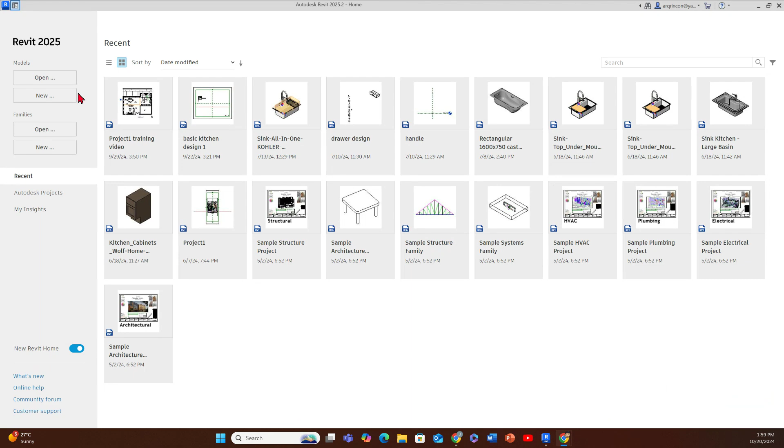Let's get into that Imperial multidisciplinary template. It's gonna be a really basic commercial project where we're gonna put some joists. The tutorial is already in Spanish, but I'm gonna try to do it also in English.

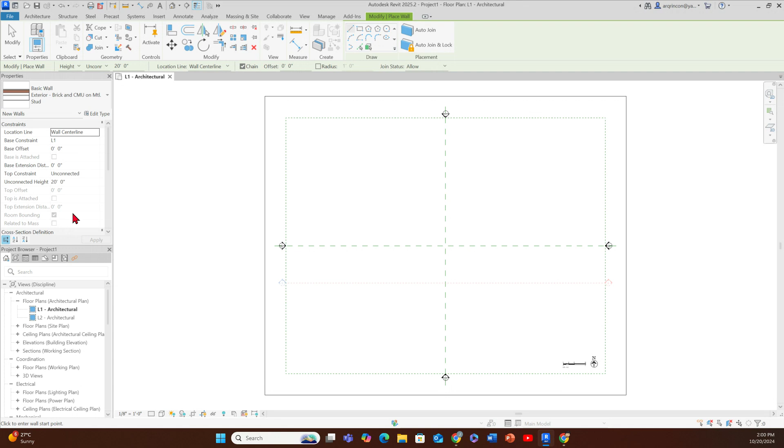Let's just start with our walls on our project on level 1, like we see here, level 1. We're gonna use those exterior fancy walls here. Let's try to use any of these ones here, we can change them later, just to make a space.

The beauty on Revit is this one that you're gonna see right away. Tell your AutoCAD to do this. If you're thinking to do the jump into Revit, well, just watch our videos.

You're gonna be surprised. If we select a vertical wall, we're gonna see a horizontal dimension, and the dimension is to the center. So just click on the little dots so you can push it to the end as well on the other side, and we can close this dimension to 100.

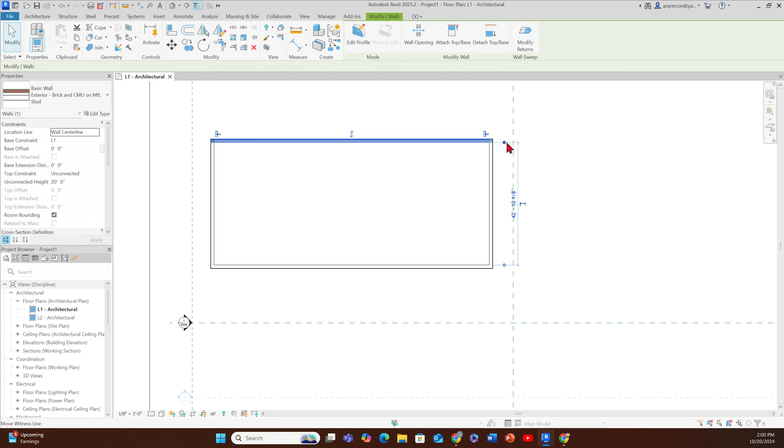Let's do it now with a horizontal wall, and let's do the same thing. Let's use those dots now that you know the little trick here, and let's change these ones for 50 feet. There we go.

So we got our exterior, right? We know that this one on the back is just a brick wall, a generic 8-inch masonry, 6-inch masonry, depends on our office standards.

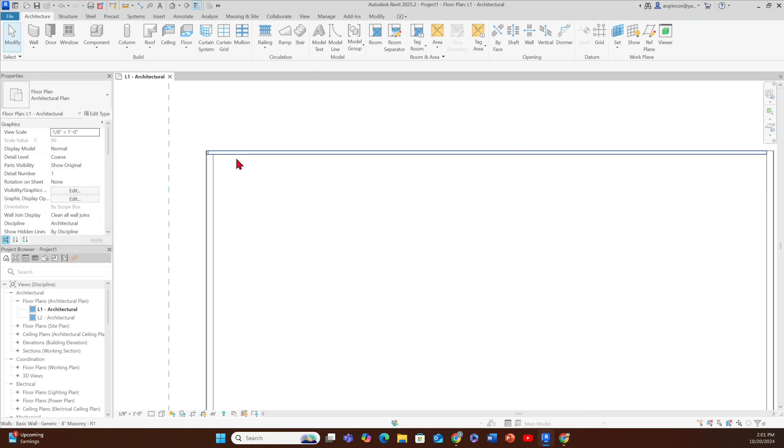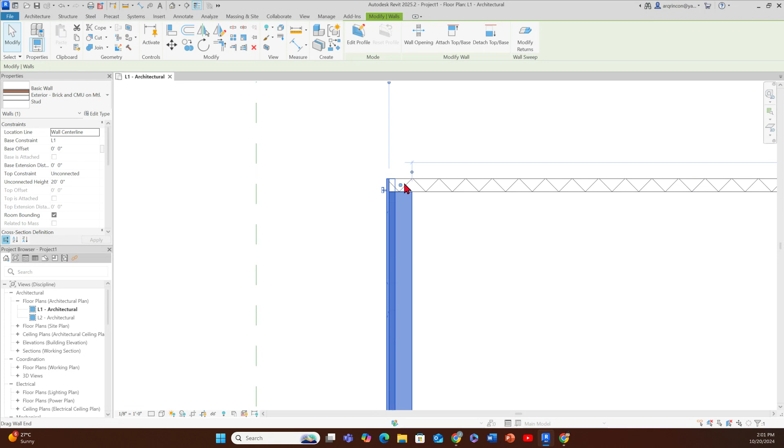There's a little problem here, the joining of the walls there, but it's not super major. We can bring this wall here or this one, and we can maybe work out the joint there. It's a matter of working this one out a little bit, and we'll get it done. Nothing major.

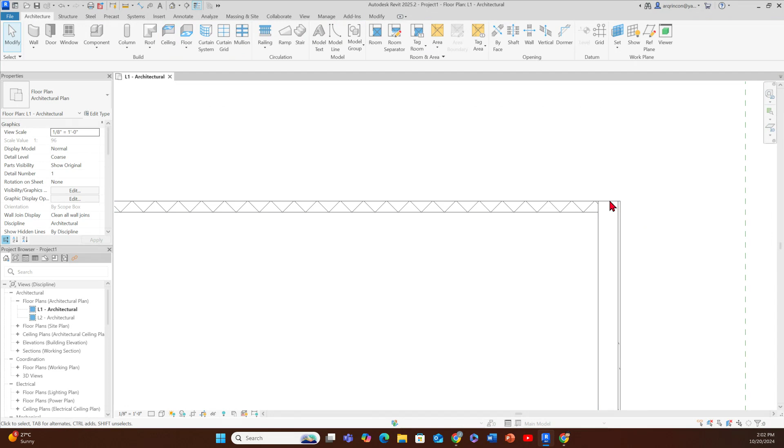Let me just get this one, and we can disallow the joint, or we can move this one. I can align the wall on the back and then bring this wall here so it can be flush like this one here on the back. A little bit of a problem there, but not much.

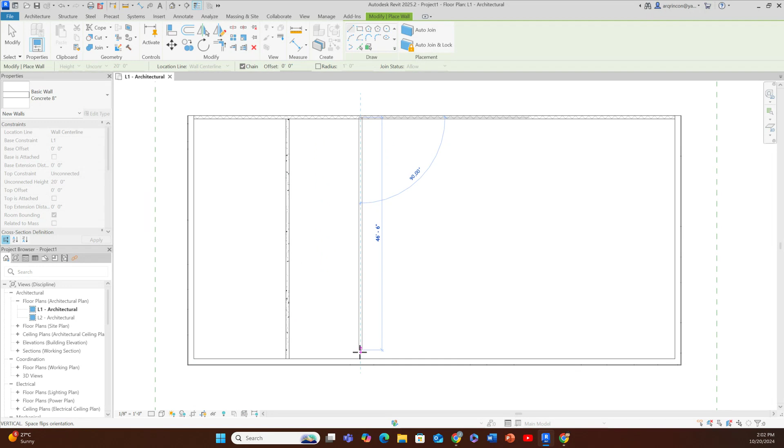There we go. So then here, let's place some interior partitions because it's a commercial project. I'm gonna use 8-inch concrete block right here to divide my rentable spaces. So I'm gonna go and do this. I pick up a concrete wall.

I'm gonna switch it. That's also one of the things on Revit. 1, 2, 3, 4, 5 spaces. I'm gonna select this wall, and I'm gonna change it. Instead of concrete, I'm gonna change it for 8-inch masonry, and right away you will see the hatch.

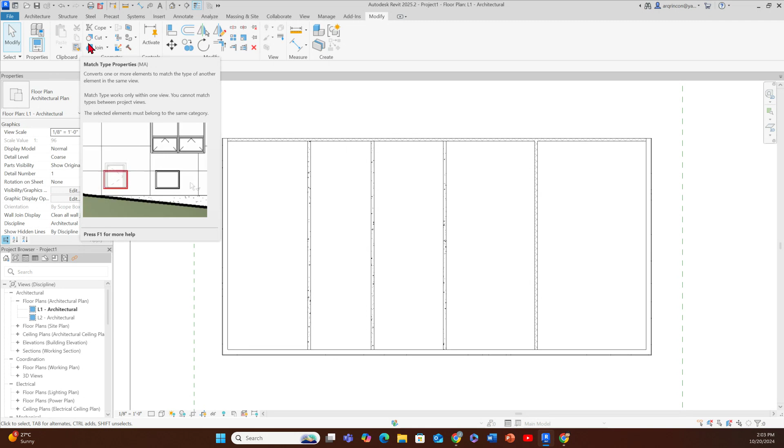So how to fix the problem that I did. Let's go to modify, let's go to match properties. If you hold a little bit, you will see a video there explaining the purpose of the command. So I'm gonna pick the properties. You see the brush is empty right now, is white, now it's black, and I can transfer those properties.

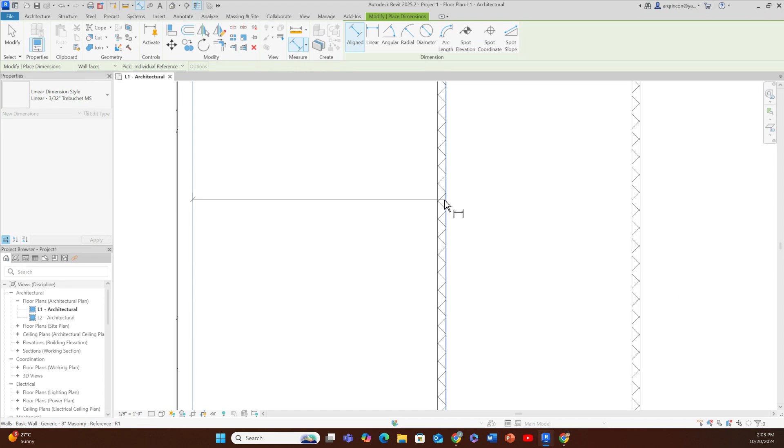Another nice trick from Revit is to go to annotate, go to aligned dimension, and use under wall faces, place a dimension right to the center of the wall, to the center of the wall, and to the center, and finally to the interior edge like we did at the beginning. You can move this dimension out if you want, and there's that equal sign, and now all the spaces are even. We can delete this one, already fulfilled the purpose, right?

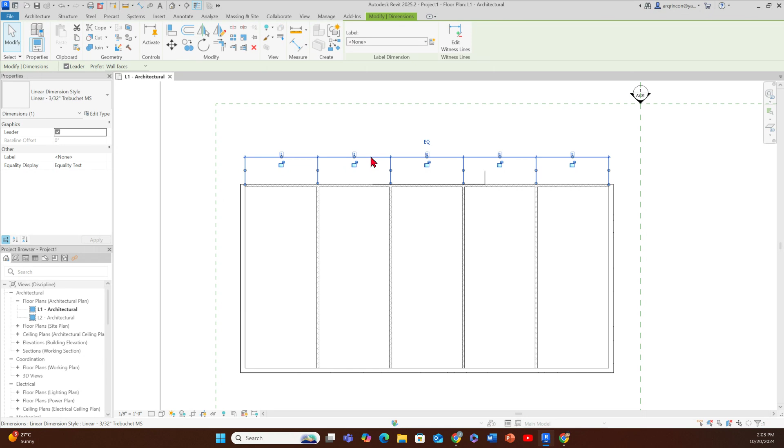So I constrained those walls, we're good. Now here we can use from the architectural tab, we can use a reference, right?

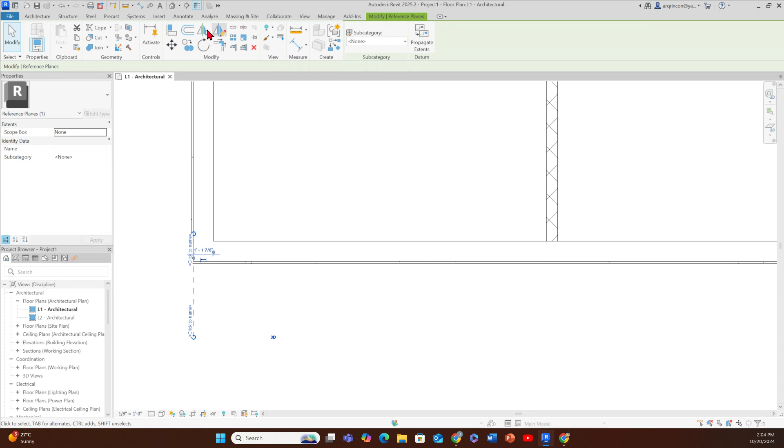A reference plane, you can use align, right? I'm gonna just use a reference plane here, so I can repeat this one or offset this one like 4 feet, right? I'm gonna try to offset this one. Okay, and I need here like 4 feet. Okay, it doesn't allow me.

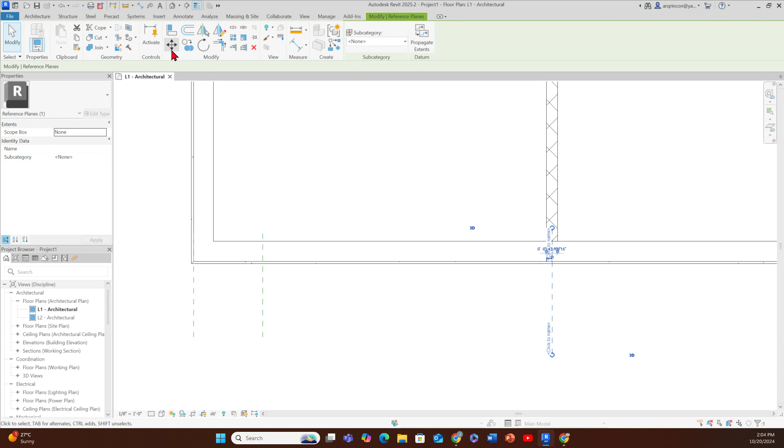Okay, so let me grab this one, copy, from here to here, right? And I can type in here 4 feet. There we go. Now I'm gonna get another reference plane from the center of my wall and copy it because it didn't allow me to offset. So I'm gonna get this one here, copy, from the origin of that line, and then 4 feet there.

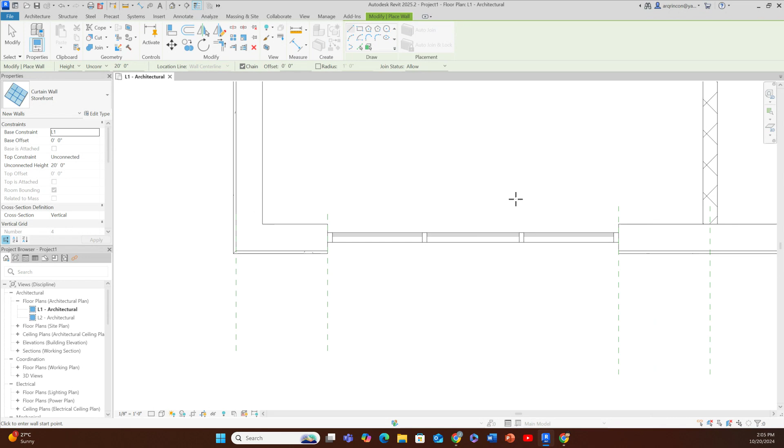Okay, why am I doing this? Because I'm gonna go and switch to the architecture tab, get a wall, and I'm gonna use the storefront wall to do a really quick basic storefront, right? So we can determine where is the front of the building, where is the back of the building, right?

Okay, so then let's go to the 3D view on the quick access toolbar. Right here we can select our storefront, and on the properties you can change the height. I'm going to change it to 16 for now.

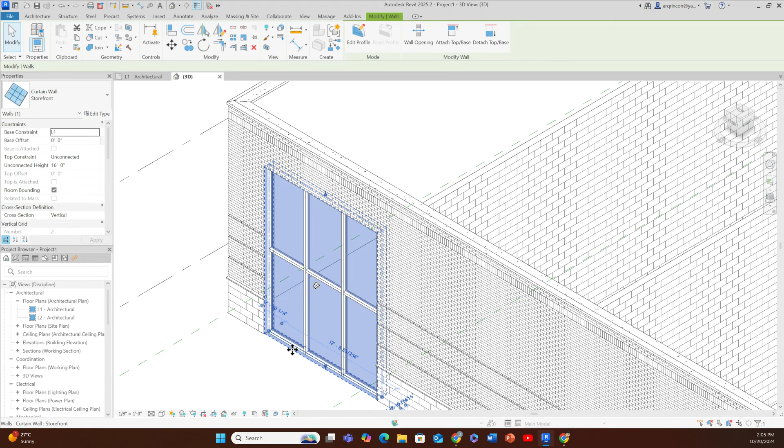There we go. Okay, that's another beautiful thing from Revit, that the Boolean operation is done just by manipulating our elements, right? Or actually you can manually, using that triangle, you can lower it down. Okay, that's it for now.

Okay, let's get this one. You're gonna see the mullion. Let me use the tab key. Grab the mullion, unpin it, and I can delete it, and I can later on place a door on this one here.

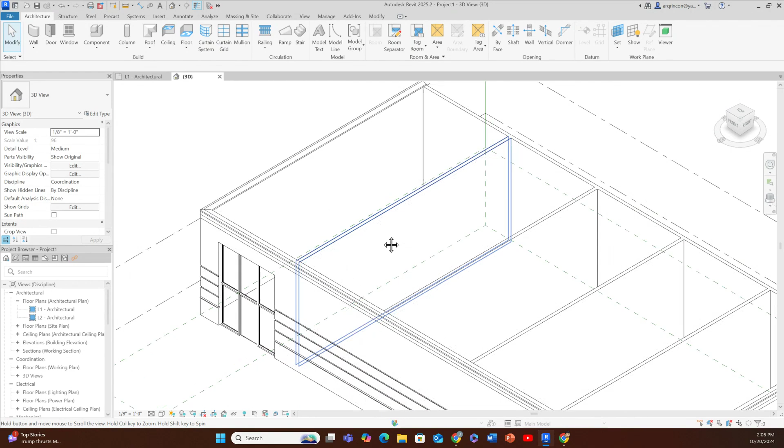Okay, let me just do something quick. Let's go to level 1, then to our south elevation on our template. Double click on elevation, and I'm gonna grab my levels and shrink them closer to my building.

This is gonna be 16 feet, and this is my ceiling level. Okay, ceiling level.

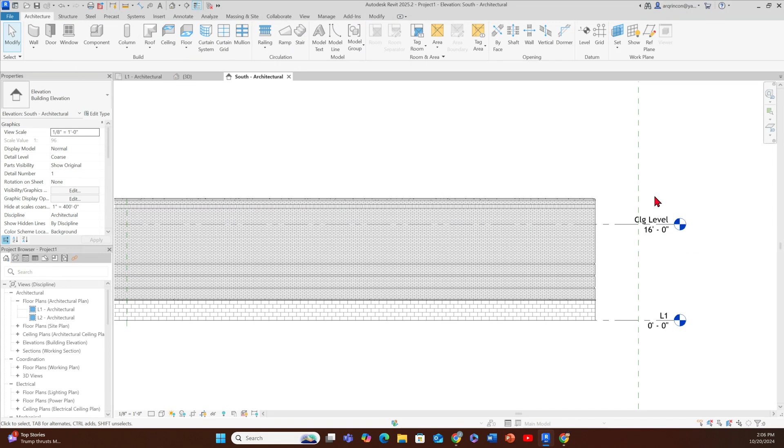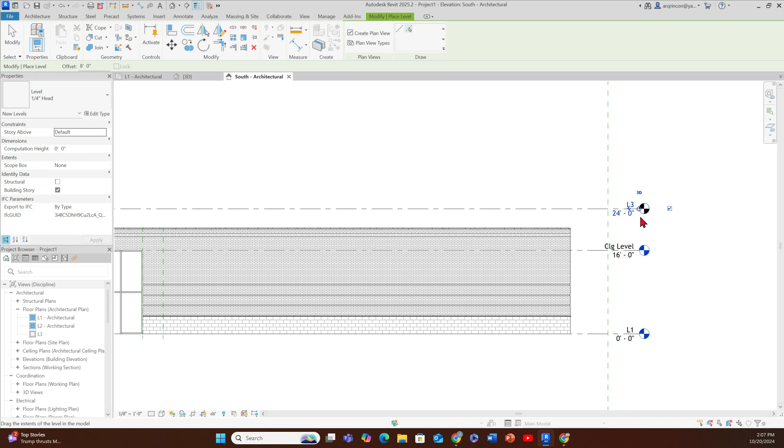I'm gonna create a level from the architectural tab. Level is under datum. Let's use this one. I'm gonna use pick line and manage an offset of, I don't know, 8 feet for now. Really important, under plan views, activate create plan view, because if it's not, it's gonna be a black symbol with no floor plan. I need this one because I'm gonna change it to be my roof level. Got it, roof level, and then I can rise all my walls to the roof level.

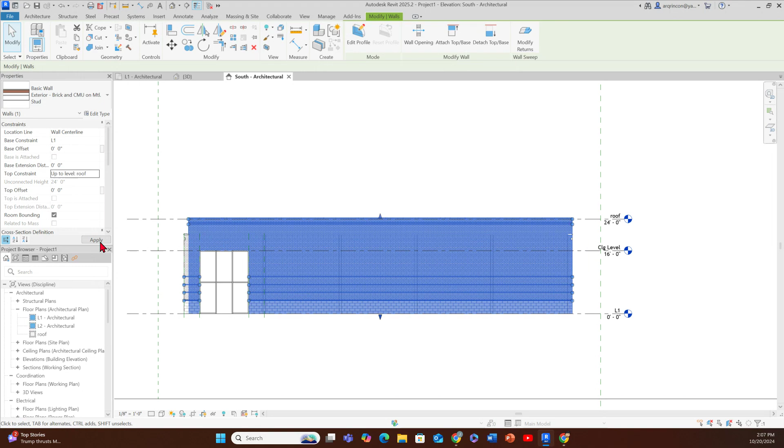So we select our wall, and on the top constraint you see it's unconstrained. I'm going to constrain it to my roof level and apply it so the wall will grow. Let me go back to my 3D because I want this one, and I'm using control to select two items at one time, and change this one also and constrain it to the roof on my properties. There we go, if I wait it will auto apply.

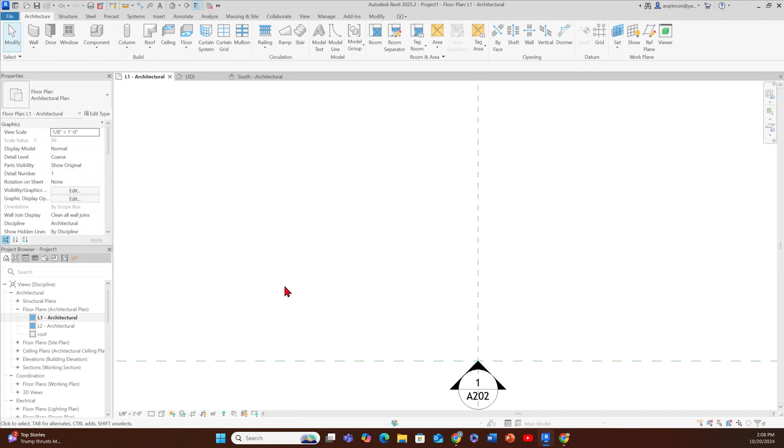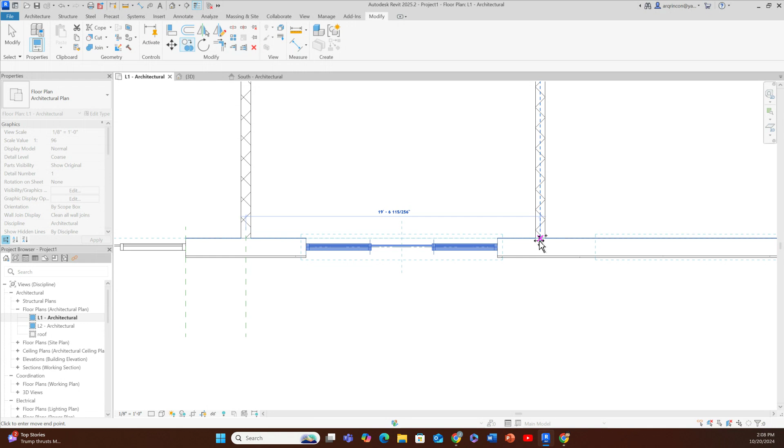Right, let's do this one really quick, the storefront. Let's go to level 1, zoom in a little bit, grab this mirror. I like the mirror with the pencil, and use the center line of my cinder block. Then here it can be easier because I can just grab this, copy multiple times, and use that intersection there, and I can get those evenly spaced.

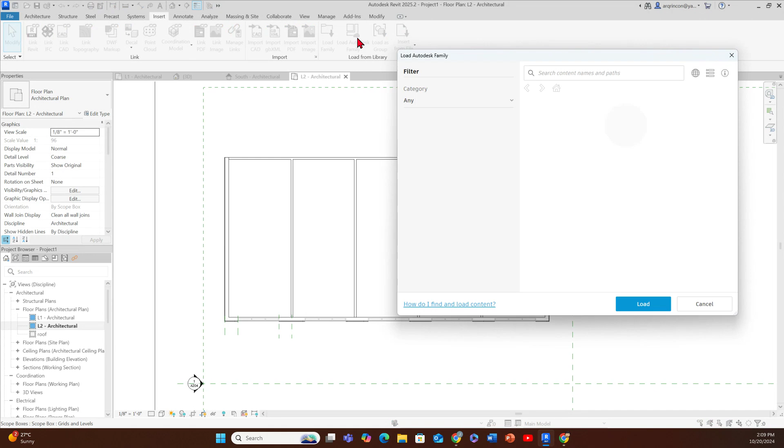There we go. Okay, let's get into our main feature here. Let's go to level 2, that I know is the ceiling plan, and we're gonna do something first. Let's go to insert and load our joist. We're gonna load the joist from the web content, so we're gonna go to this icon. We're gonna look here under those categories, browsing to the structural framing.

And then here, specifically under steel, I'm gonna choose this K series bar, or K series bar rod, or angle, okay? Either or, whichever one you use most in your office. Let's use any of those. I'm gonna use the rod one.

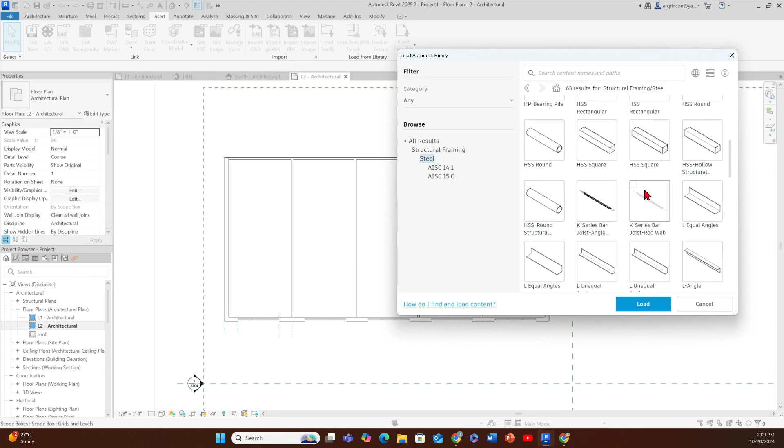I'm gonna load it. Right now it's showing me a dialog box where I need to choose my joist. So if I do that rule of thumb, 50 feet divided over 2 is 25 inches, so I need to look for something close to or bigger than 2 feet. I have the 2 feet, 2 feet, 2 feet options. I can choose this one, or jump into the next kind of joist, so I can go in between. I don't know, ask the structural engineer for advice or something.

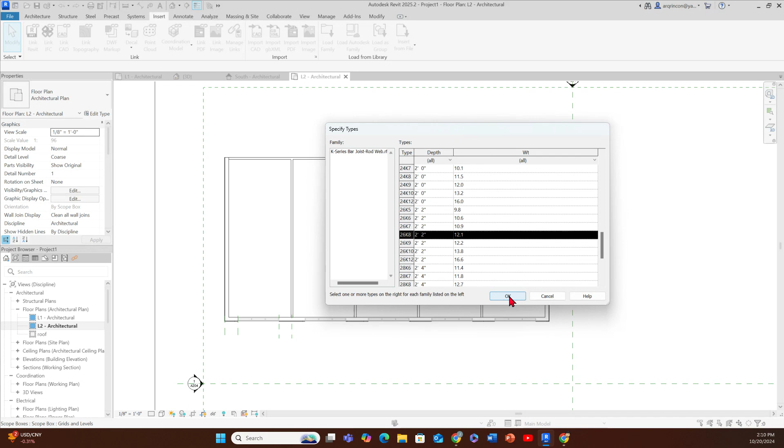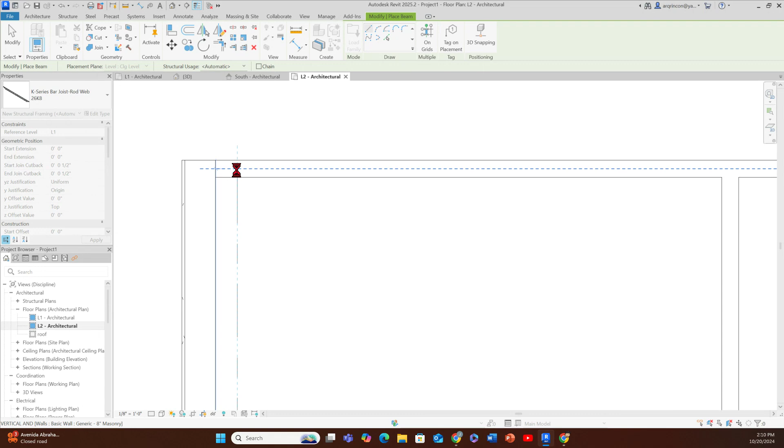So I'm gonna load it, number one, it needs to be loaded. Then I need to go to structure, beam, and you're gonna notice that now it's ready for us to use. I'm gonna apply one joist in the middle here, going all the way to the back, to also my middle on my cinder block wall. There we go, we got him.

Then let's go to the 3D. We can go to the top view because it's gonna be almost impossible to go to level 1 and select the joist. It's not impossible, it's just time consuming. Let's go to that 3D view.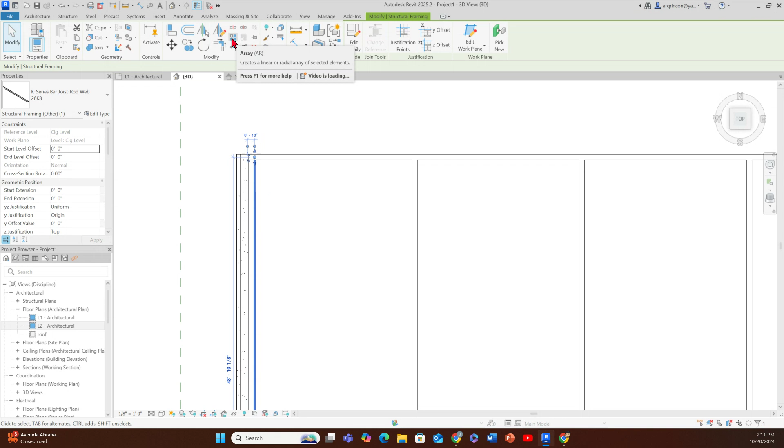Let's select the joist because it's gonna be easier here, and after selecting the joist we can apply an array. So let's do a really quick array, here from the middle, with a separation of 3 feet. Like I told you, we need to wait for the advice of the structural engineer, but more likely this is the rule of thumb. So let's do that repetition. You see that it's an array of 2 items, so I can go here and put 24 and click on the drafting area.

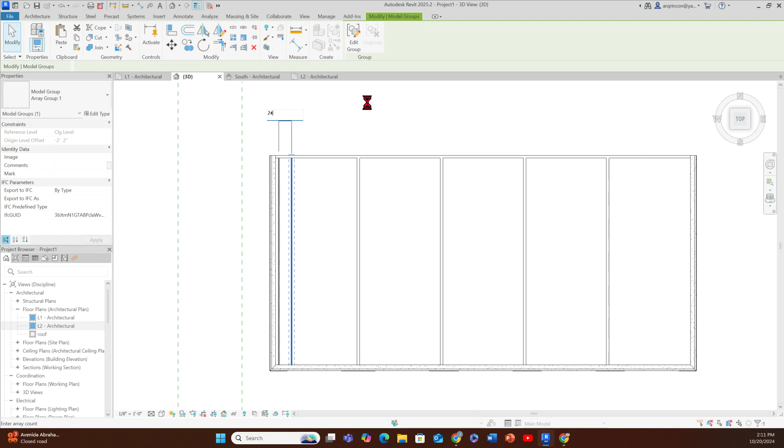Okay, I need a few more. I'm gonna go for 32 and see if it works. I think I need 33. Okay, there we go, and we got our joist in place.

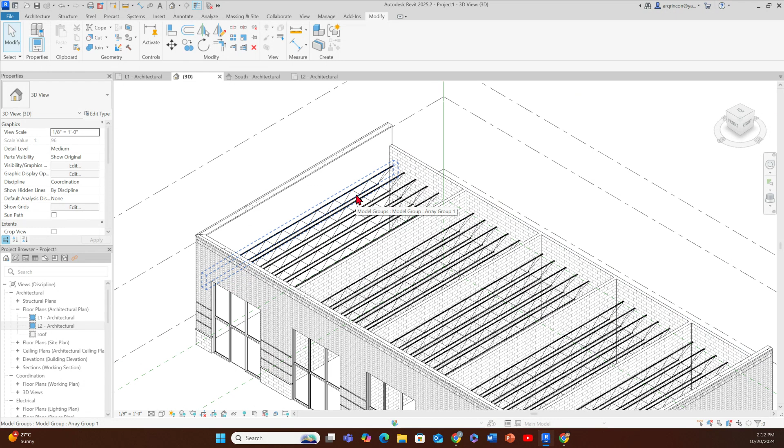We're gonna do something else. Let's go to home on our view cube, and you're gonna see those joists are not on the proper elevation. We're gonna adjust them. So let's go to level 1, do a section from the quick access toolbar or the view tab, and request a section. So draw a section this way, and double click on the blue symbol so you can activate it.

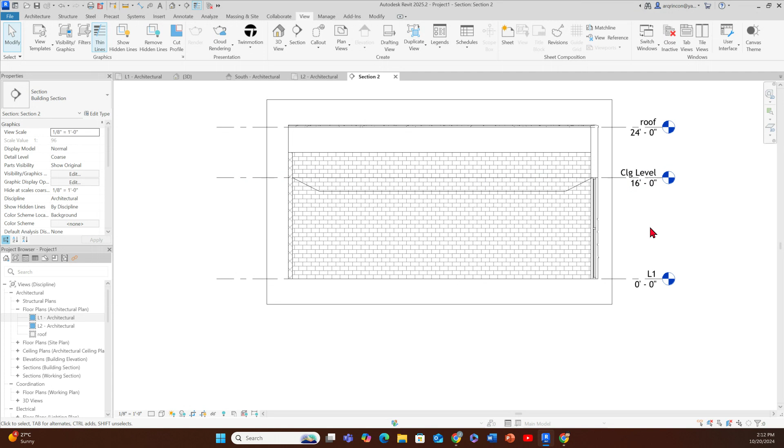So my joists are on level 2, that is now called ceiling, ceiling level. And I can rise them up and recreate. So I'm gonna put here top of beam, top of beam, and I'm gonna change this one to 20 feet.

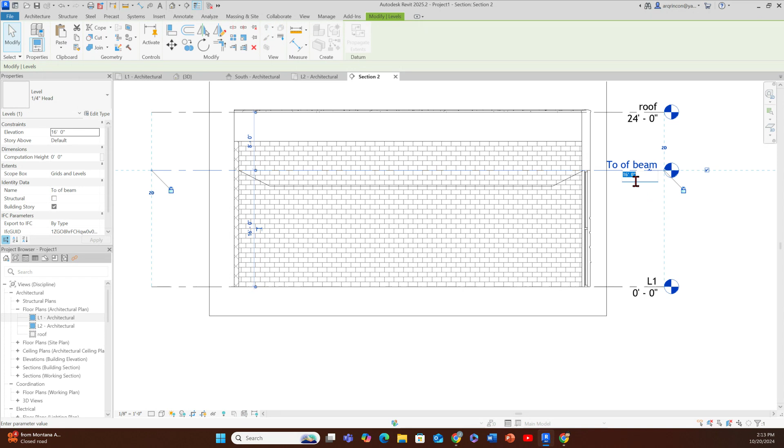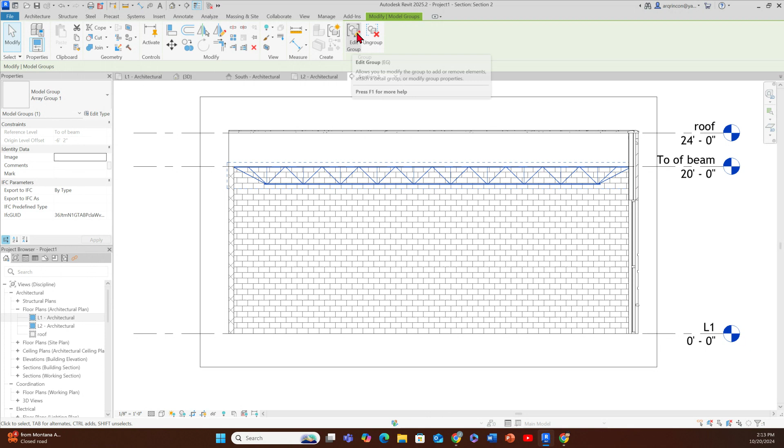So let's select our array of joist, and edit the group. This is the key, edit the group. Now you get a nice tracing paper environment, and you select the joist again, and you're gonna see an elevation. This is our elevation, that's 0,0, and I'm gonna put here minus 0 space 10, or you can put 10 and then the semicolon for the inches.

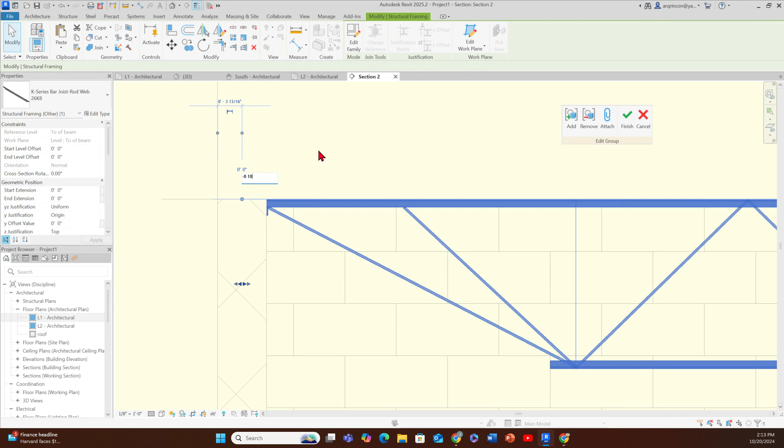I'm gonna zoom out a little bit so we can see, and hit enter so it can be applied. I'm gonna finish, and all the joists are gonna be tilted. Got it? And we can start working on our project a little bit different.

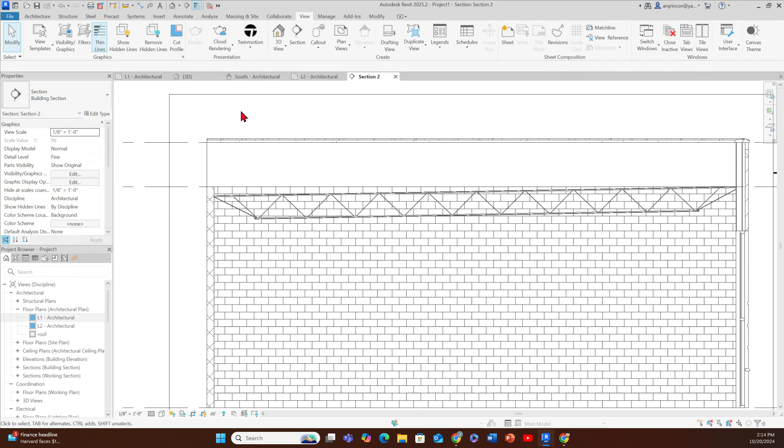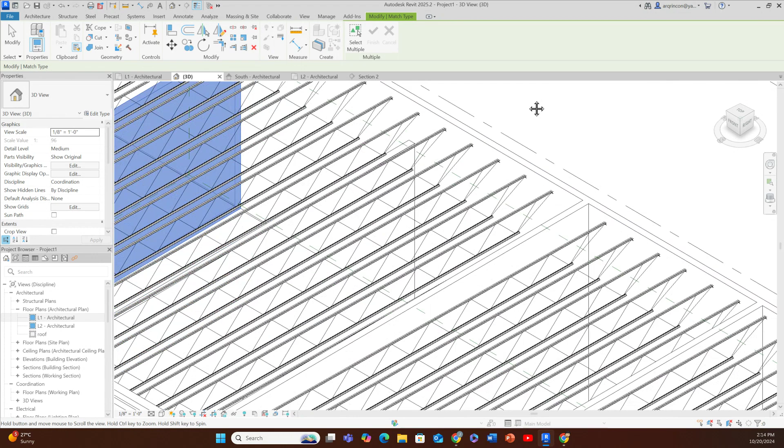Let's go to 3D view. Let's select this one, and under the unconnected, I'm gonna go here for 16 feet. I'm gonna apply 16 feet so the wall can go down, and I'm gonna match the remaining cinder block to our retaining walls. So I'm gonna lower those down a little bit, and we will complete the project a different way.

Okay, so the next thing to complement this project a little bit is to place a roof. So roof is easy because we're gonna go to our architectural tab, and we're gonna go to roof by extrusion. We're gonna pick a plane, and our plane is this one here.

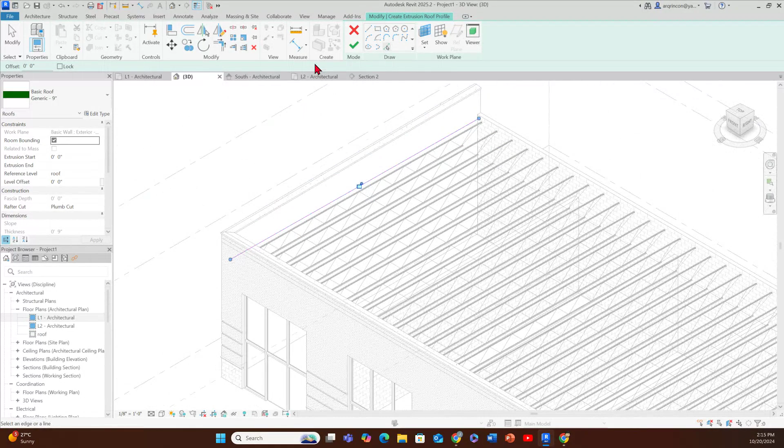That's our plane, and we're gonna put here to the roof level. Yes, I will do the adjustments if I'm not choosing the right level. I'm gonna use the pick line tool, and I'm gonna pick the joist, one of the joist lines there. And I'm gonna finish, and the roof is there.

The roof is there. Let me go here for a shaded view. So the roof is here, those two arrows there, you just pull them. That's my roof, and I'm gonna do the adjustment, don't worry.

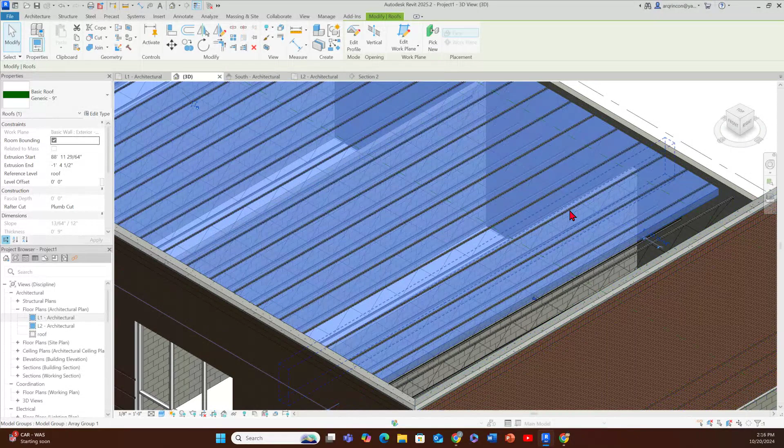It's just to see the advantages of using Revit for your modeling and your construction documents as well. Because some people just like to do the modeling, but it's not just about modeling.

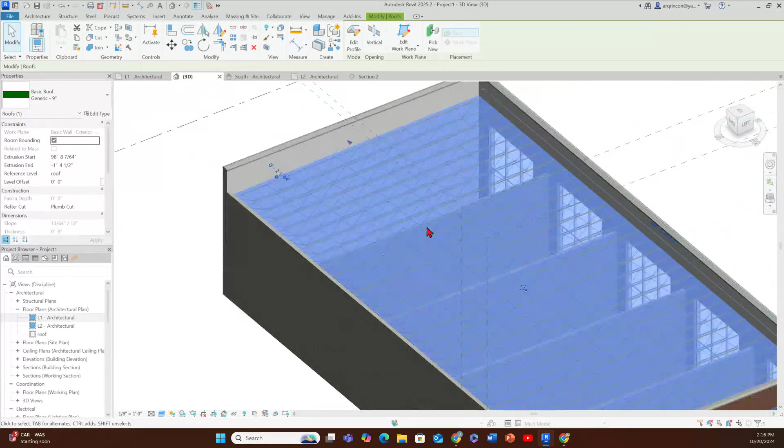So this is for now. Let's go back to our section just to do the corrections. That's our roof, and you're gonna notice that it's not in the proper place, because the roof is created from the top down.

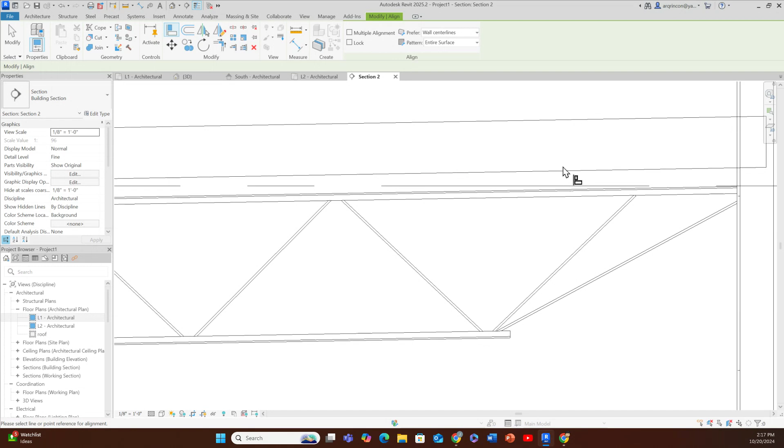So one thing that we can do, we can just select the roof. You can actually move this one manually. We need to align now the bottom of the roof with our joist. So I'm gonna use this a little bit away, so I'm gonna align the roof with my joist here.

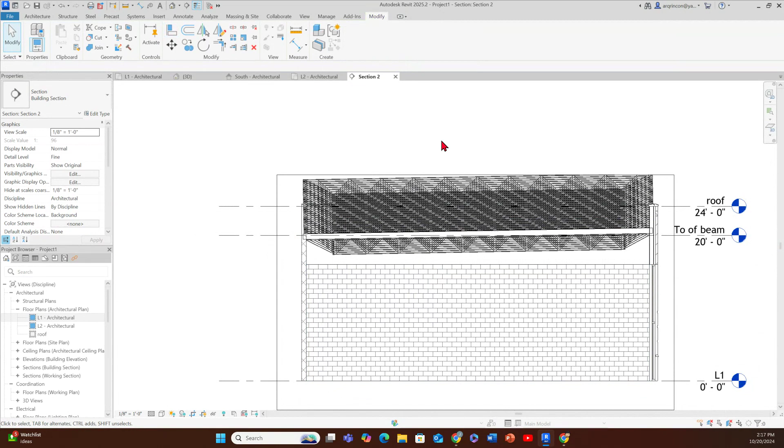Okay, there we go. Let me, I think I did something, let me go again and do this one again. Okay, here, align, oops. Okay, modify, align, little glitch, it happens. Okay, so let's select the joist and then select the roof.

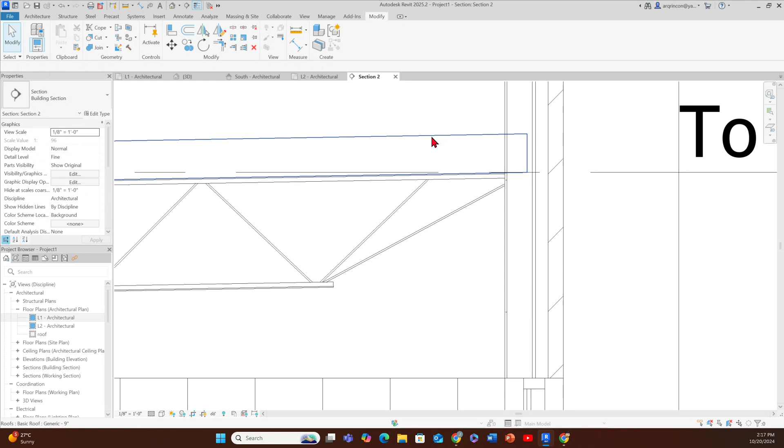Got it? So we got him, and because it's a roof by extrusion, you're gonna notice this problem. So select the roof, edit the profile, bring this line up to the edge. And this one, depending on your project, maybe go a little bit off.

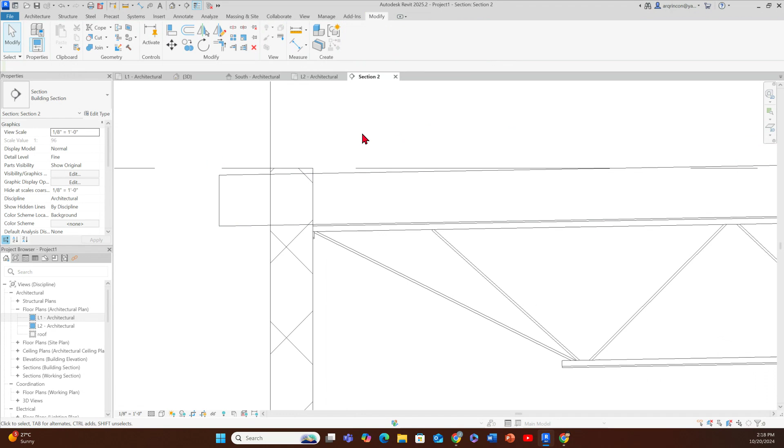So we can drop the water a little bit. Finish this. Also select the roof, go to your roof types. Let's go away from the generic 9, and maybe we can use an insulation on metal deck. Got it, there we go. Or it can be just metal deck.

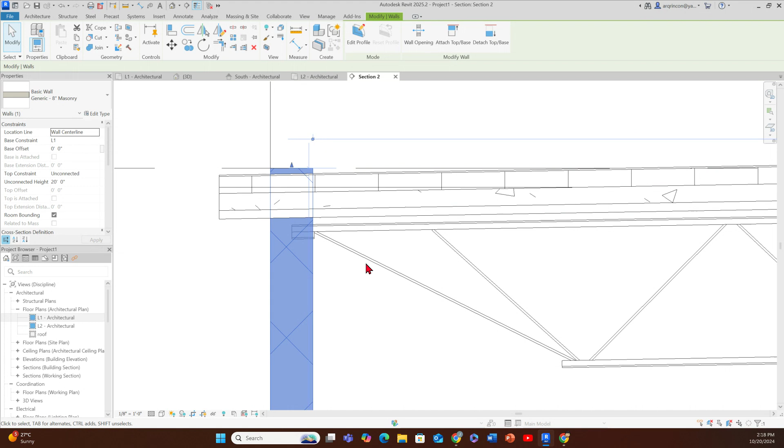Okay, this wall has a little clashing there. So, well, you can pull this one, or we can use the old trick, attach the top of the wall to the base of the roof. So let's just select the roof, and now our wall is there.

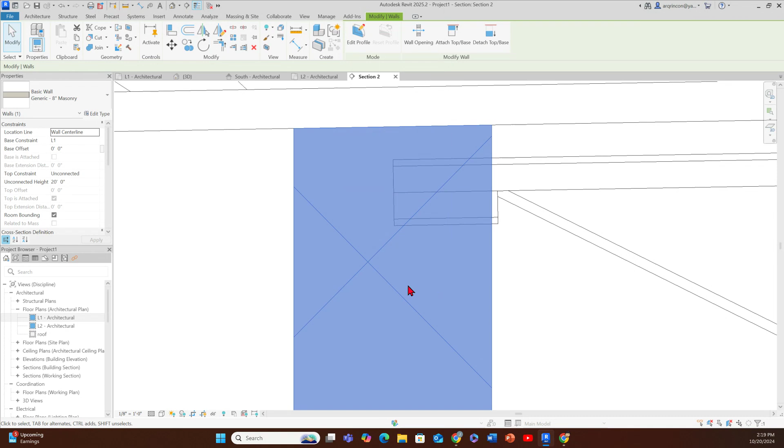Okay, the intention on this video is to manipulate a metal plate that is going to hold the joist inside with a U-channel and concrete here, and not like putting bracing here. Okay, it's a really basic commercial project.

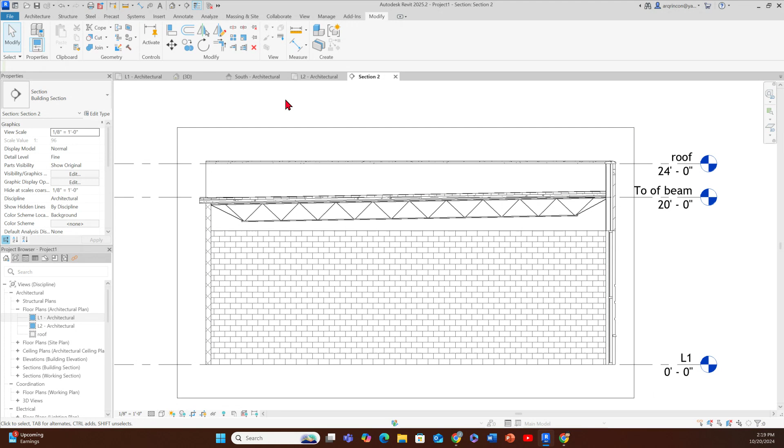That is kind of showing us how we can start getting into this kind of projects. Later on I will try to do the foundation and do the construction details, and hope getting you guys all the way, so you can do the jump from AutoCAD into Revit, because this is gonna get you guys a lot of different solutions that we can work on.

And you see, it's a really nice, decent project created in a few minutes, and is actually really good. Okay, it's Rincon Beam Consulting.